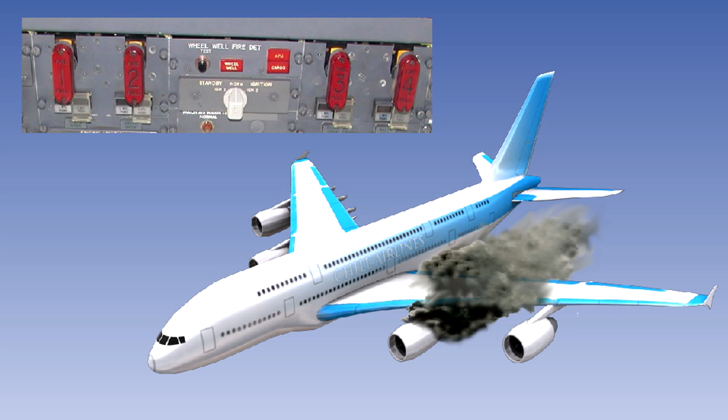In this lesson, we will discuss the fire detection systems fitted to all aircraft.

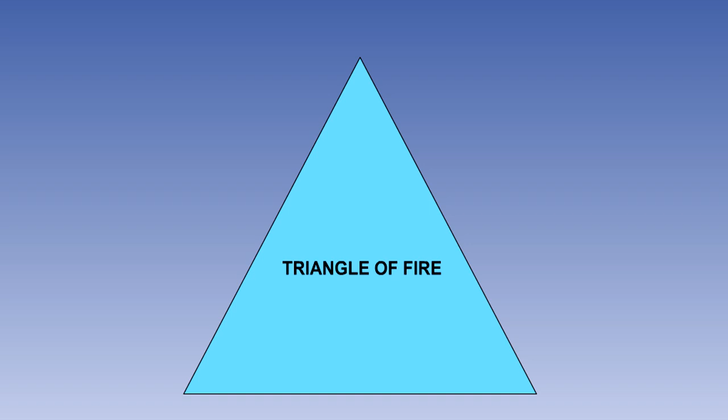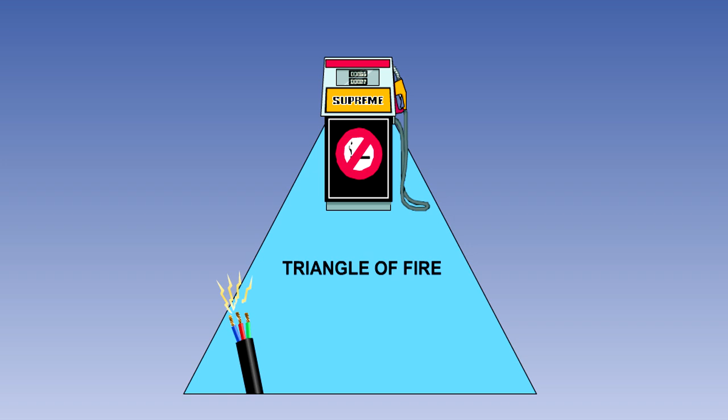A fire cannot exist without three things being present: heat or a source of ignition, fuel, material that will burn, and oxygen. This is known as the triangle of fire. Take any one of the three away and the fire will go out.

A fire in an aircraft is extremely dangerous. So to protect the aircraft, the crew and the passengers, aircraft must have fire detection and extinguishing systems fitted in all areas where a potential fire risk may exist, following failure of or leakage from any component or associated equipment.

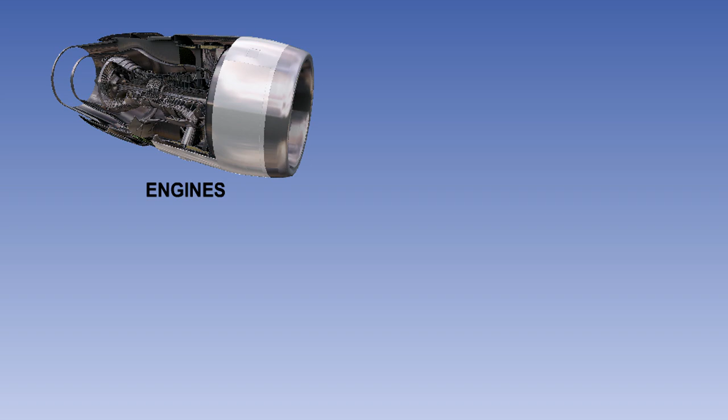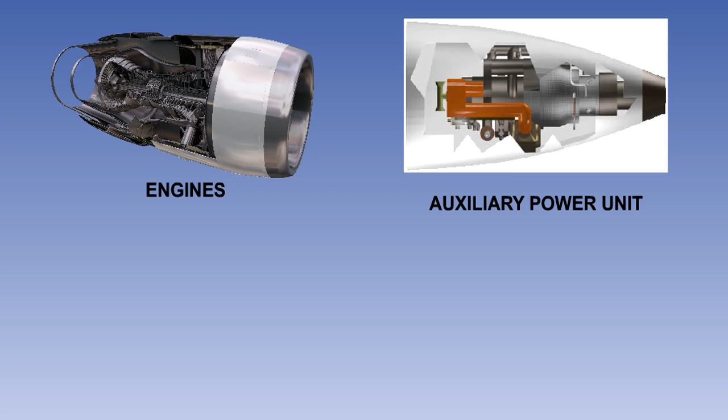The specific areas that require protection are the engines, the auxiliary power unit or APU, the main wheel wells, and the cargo compartments.

These areas are known as designated fire zones, and they must have detection systems fitted to warn the crew of a fire.

In the case of the engines and the auxiliary power unit, they are isolated by fireproof bulkheads, known as firewalls, normally manufactured from titanium or stainless steel, which will contain any fire to the immediate area and prevent it from spreading to the rest of the aircraft.

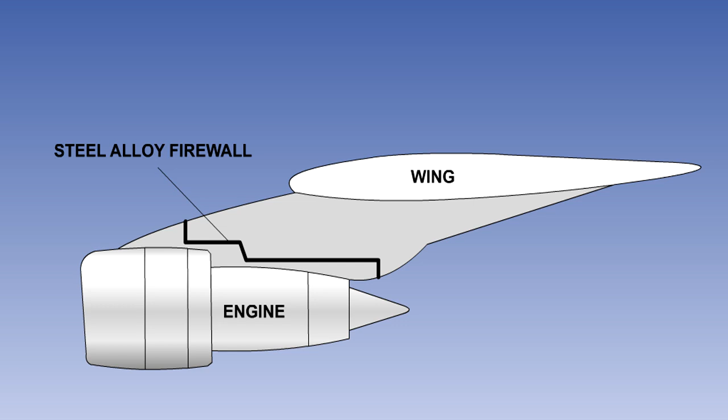Each designated fire zone must have a fire detection system which is capable of providing rapid detection and warning of a localized fire or overheat condition. There are a number of detection systems in use, and we will now take a look at them.

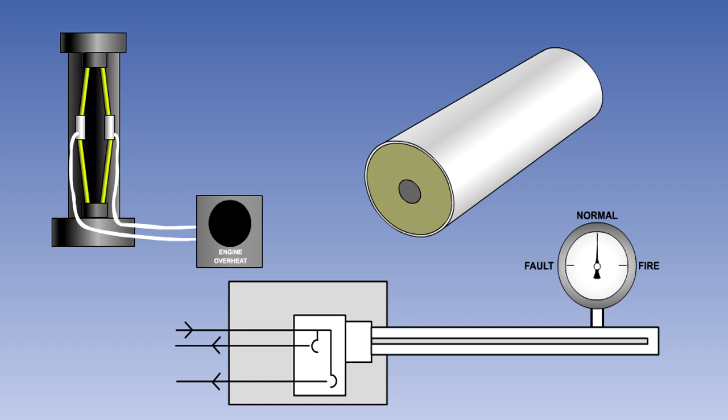Differential expansion detectors use the fact that when heat is applied to different materials, they will expand at different rates.

A detector consists of a pair of contacts mounted on a spring bow assembly, fitted within an expansion tube, which is mounted on a base. The spring bow is fixed to the tube at the top and the bottom. When heat is applied, the tube expands at a greater rate than the bow, drawing the contacts together.

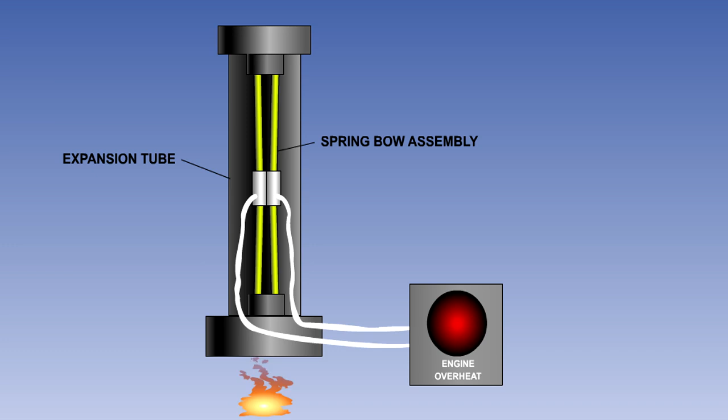When the contacts come together, they provide power to the warning circuit. A subsequent drop in temperature will cause the tube to shorten, the contact to open, and the warning to stop. This type of detector usually incorporates a short time delay before the warning is activated, to prevent false warnings due to vibration.

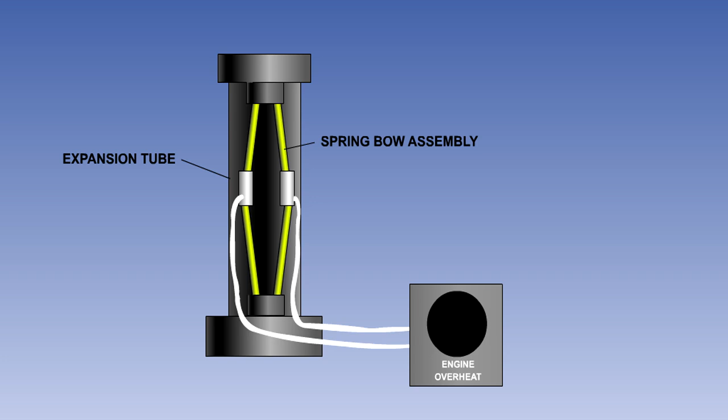Differential expansion detectors are often used to monitor engine cooling air outlets in order to provide internal engine overheat warning. In the event of this warning being given, the pilots will normally be required to shut down the engine.

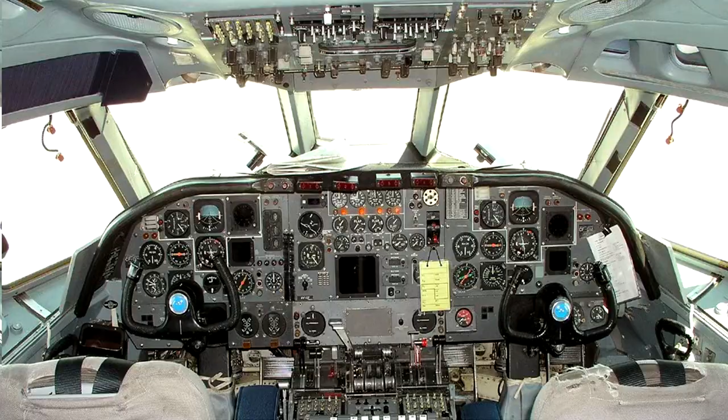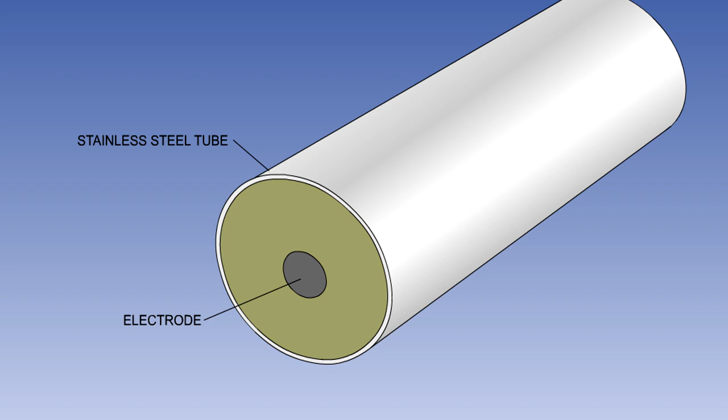Engine and auxiliary power unit fire zones are often fitted with continuous loop fire detectors, commonly known as firewire systems. A detector unit consists of a stainless steel tube with a central electrode insulated from the tube by a core of temperature-sensitive material.

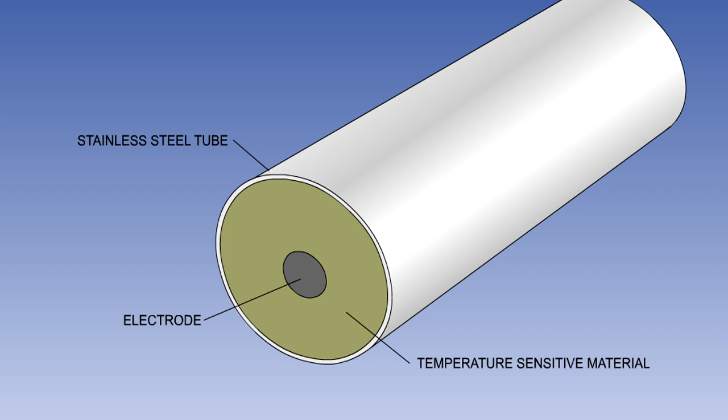Firewire detectors operate on the principle of their core material having either a negative coefficient of resistance with temperature or a positive coefficient of capacitance with temperature. In one system, both methods are used together.

In the resistive type of firewire, as the temperature increases, the resistance of the insulating material decreases. This causes the current flow between the central electrode and the outer tube to increase, until, at a predetermined temperature, sufficient current will flow and the warning system will operate. If the temperature drops back below a preset value, the system will automatically reset, and the warning will stop.

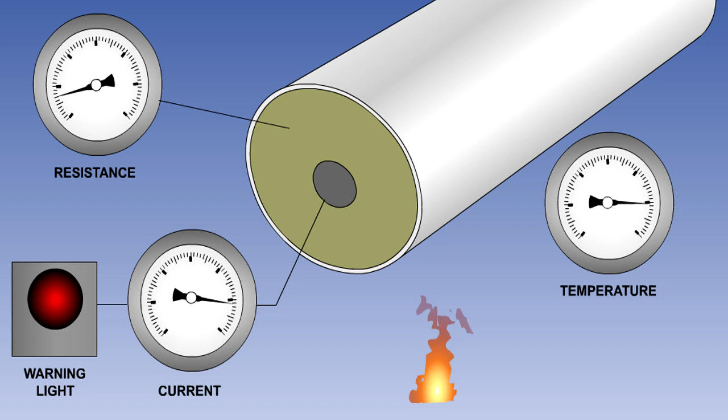This type of detector will react and give a fire warning if there is an isolated temperature increase, for instance from a direct flame, or if the temperature of the entire detector increases, possibly because of a hot gas leak.

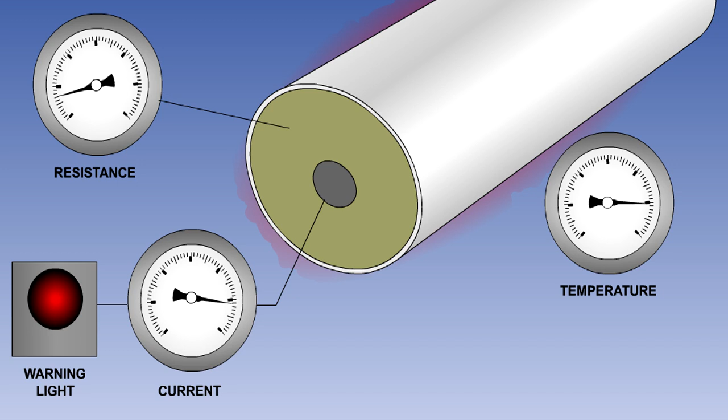Because the loop is connected to the control unit at both ends, the system will continue functioning with a single break in the firewire. One particular problem with this type of system is that a short circuit between the case and the inner electrode will give a false fire warning.

In the capacitive type of system, the detector acts as a long capacitor, with the core material acting as the dielectric, and the case and the inner electrode as the poles. The case and the inner electrode are connected across an AC supply.

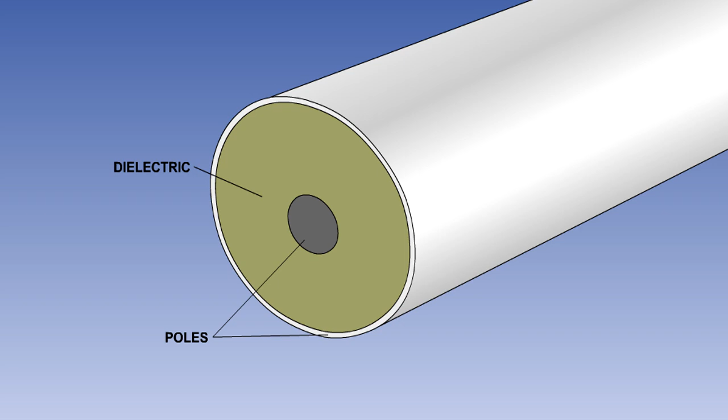An increase in temperature causes a change in the properties of the inner core material. This change increases the capacitance of the detector. The firewire is polarized by the application of half-wave rectified alternating current from a control unit, which it stores and then discharges as a feedback current.

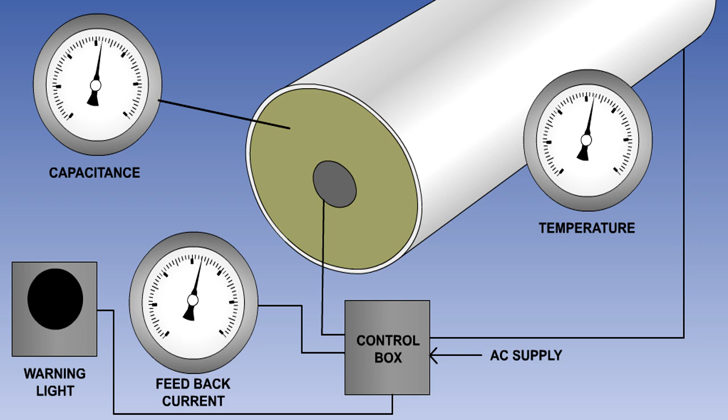As the capacitance increases with temperature increase, so will the feedback current. Once the feedback current reaches a predetermined level, it activates the fire warning. As with the resistive type, this system will reset itself once the temperature drops below a preset level.

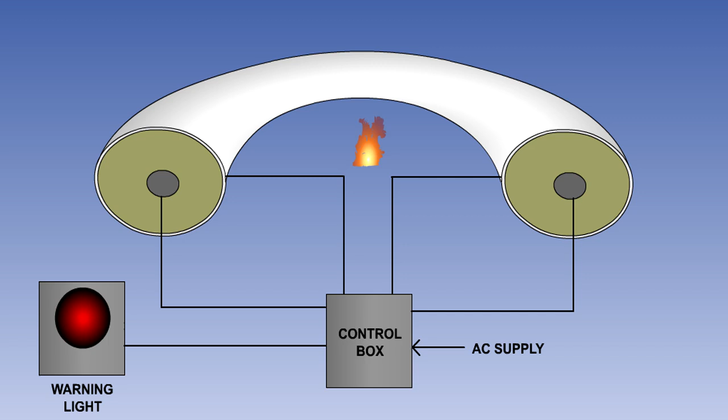This type of detector will also react and give a fire warning if there is an isolated temperature increase, for instance from a direct flame, or if the temperature of the entire detector increases.

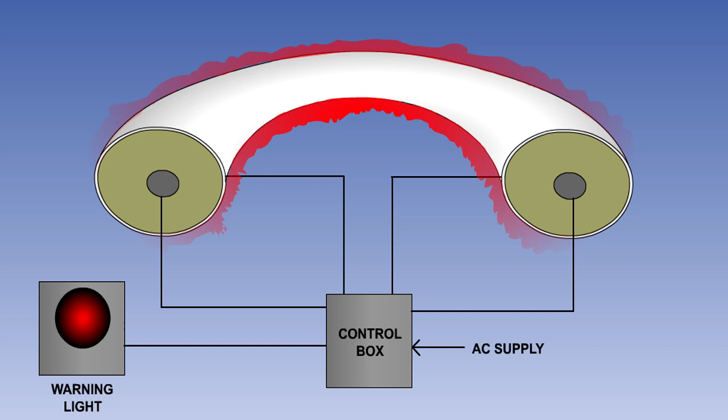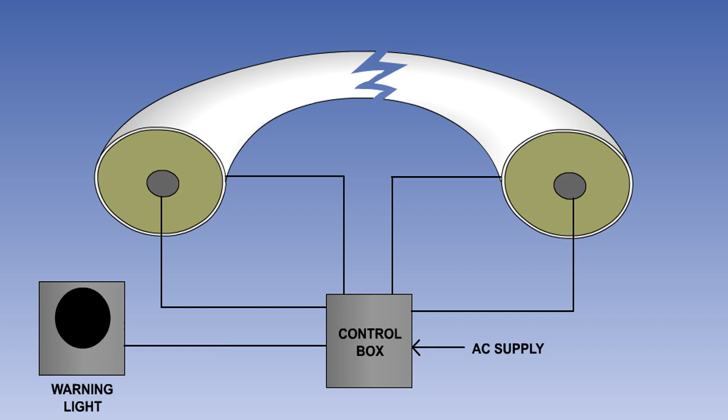Again, as with the resistive system, the loop is connected to the control unit at both ends, so the system will continue to operate normally in the event of a single break in the firewire. This system has the advantage over the resistive type in that a short-circuit grounding of the element or system will cause the capacitance to fall to zero, so will not result in a false warning.

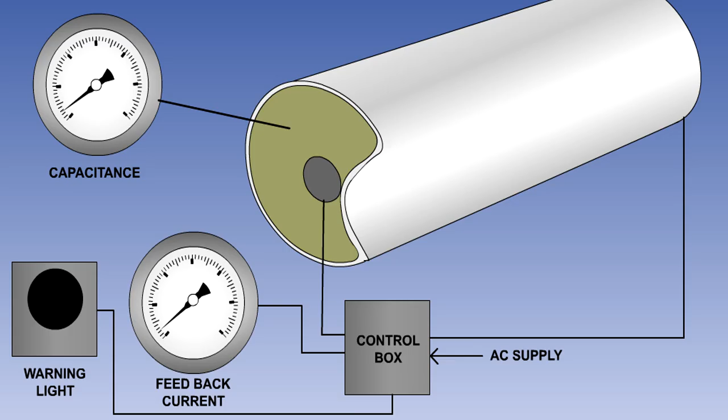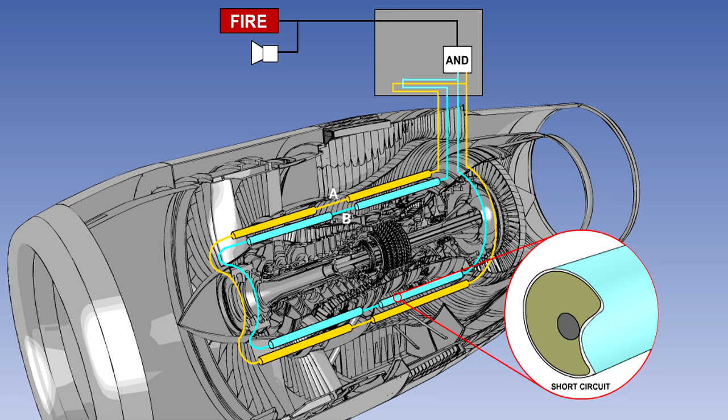Firewires are positioned around engine fire zones in a continuous double loop. The two loops are normally known as Loop A and Loop B, and they operate independently. Both loops need to detect a fire to initiate the warning. In this way, spurious warnings caused by one loop giving a false fire indication, possibly due to a short circuit, are prevented. Warning of any loop failure may be displayed on the fire detection panel or electronic system display unit.

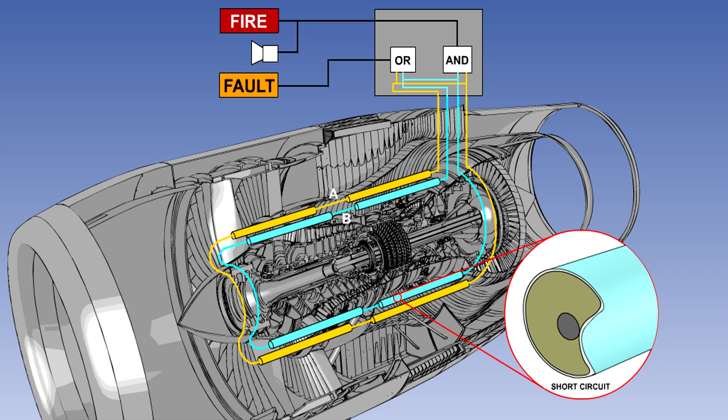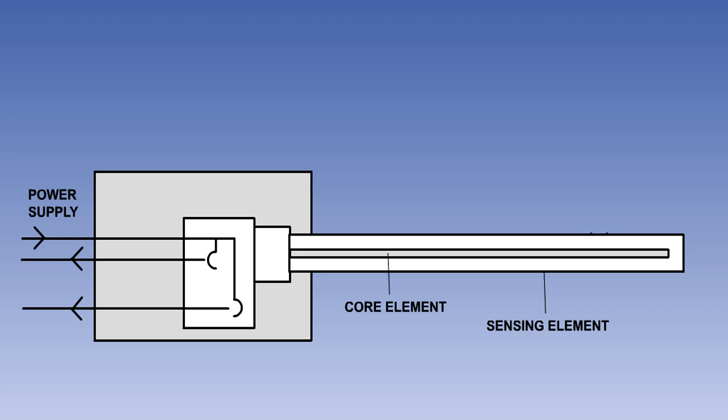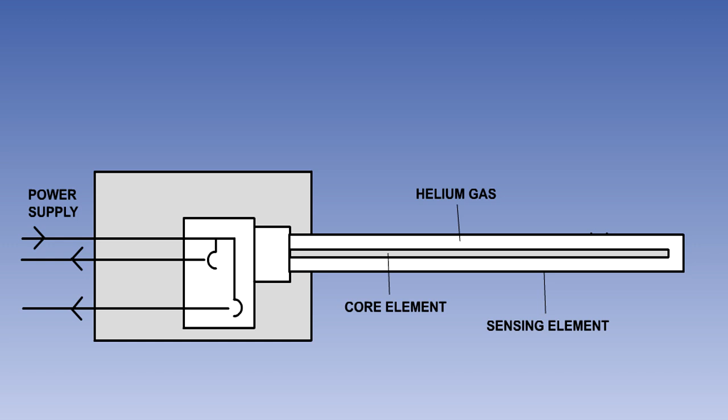The last system we are going to look at is the gas-filled detector system. This system consists of a number of sensing elements which look very similar to firewire, and they are used in a very similar way. The tube has a central core, made up of a material which will give off hydrogen gas when heated to a high temperature. During the manufacturing process, helium gas is forced into the tube under pressure. The tube is then sealed.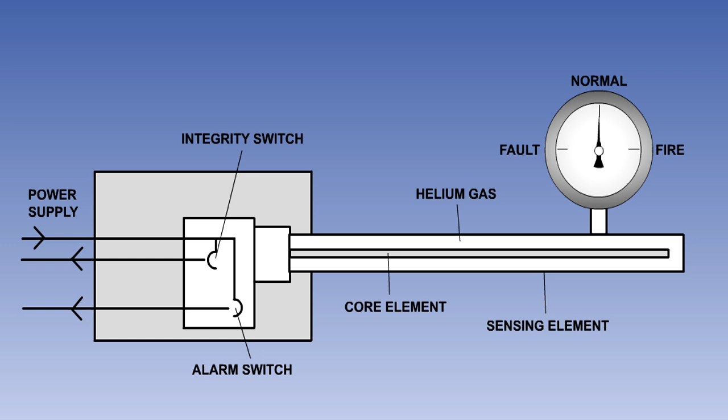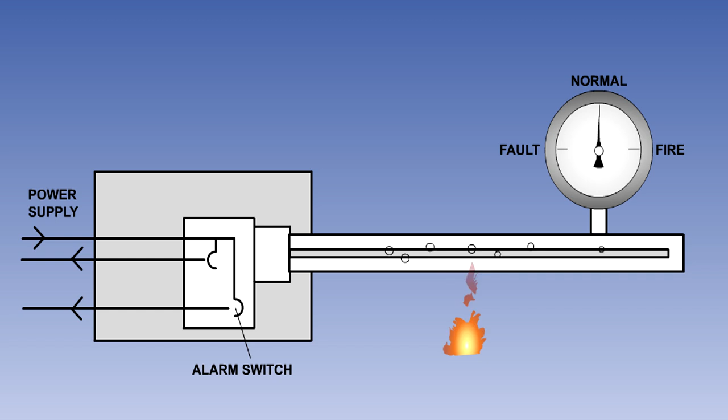As with firewire, the detectors are positioned around the fire zones in a double loop, with both loops again being required to detect a fire before a fire warning is given. When the gas-filled detector tube is heated locally by a flame, the helium pressure may not increase sufficiently to trigger the warning. However, hydrogen gas is released from the core material, and the pressure in the tube will build up. This increase of pressure is sensed by the alarm pressure switch, which will close. This will send a signal to a control box, which will initiate a fire warning.

In the event of a hot gas leak, the temperature increase will be less than that caused by a flame, but it will be felt over a larger area of the detector. This increase in temperature may be insufficient to cause the release of hydrogen gas, but it will cause sufficient increase in the pressure of the helium gas to close the alarm pressure switch and initiate a fire warning.

Should the tube be damaged and the helium gas be released from the core, the pressure will fall and the normally closed integrity pressure switch will open. This will cause a fault indication on the control panel or electronic systems display.

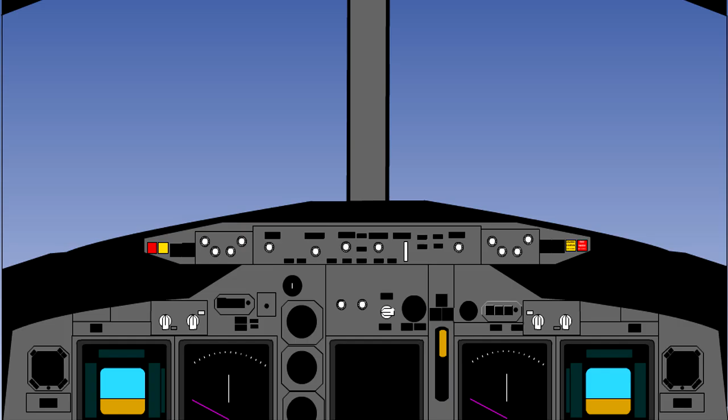Whichever detection system is used, flight deck indications of an engine fire will normally be both aural and visual. The aural warning will normally be a bell or a klaxon, or possibly a continuous repetitive chime. Visually, there may be a master fire warning caption and a steady red fire warning light for each engine.

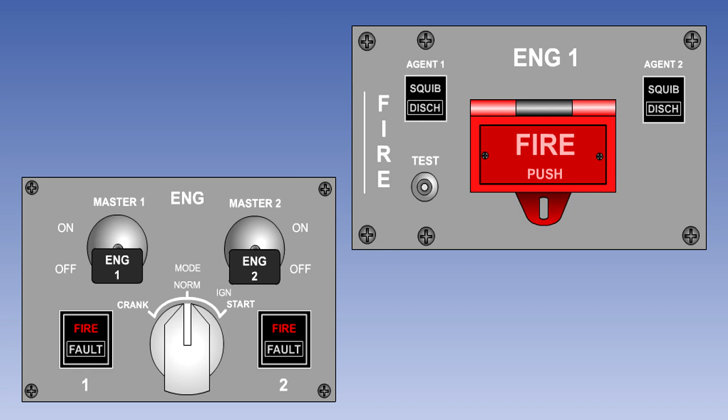Before flight, a means must be available to test the fire warning circuit. A fire test selector is therefore provided for the flight crew. With differential expansion detectors, a simple continuity test is carried out on the wiring between the detector or detectors and the warning light. A satisfactory test is indicated by illumination of the warning light.

When a fire test is initiated on a firewire system, a continuity test is carried out on both the outer tube and the inner electrode. A satisfactory test is indicated by a full fire warning being displayed for all engines being tested. Should there be a break in either the tube or the electrode of the firewire for a particular engine, then the test will fail, and a fire warning will not be given for that engine.

When a fire test is carried out on the gas-filled system, again the integrity of the loops is tested. But also, if the gas has leaked out and the integrity switch is open, then the test will fail.

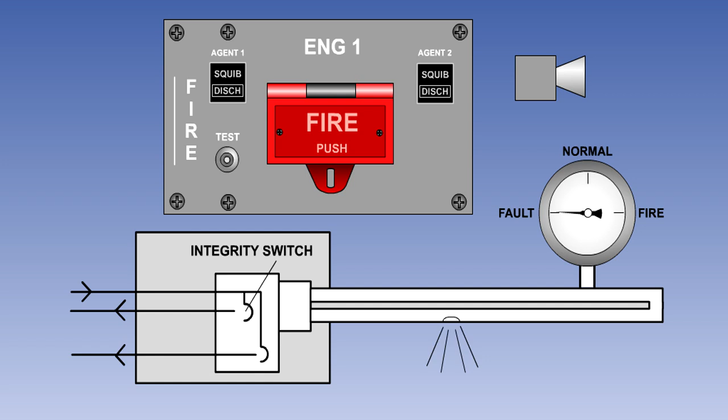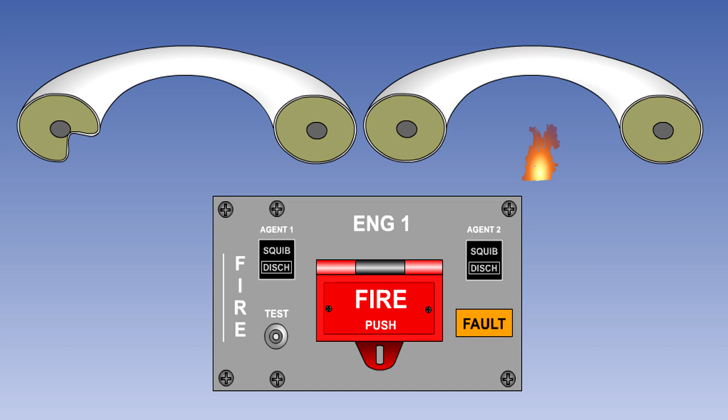In some firewire and gas-filled detector systems, a warning is given to notify crews if a single fire loop should fail in flight. The system may now automatically switch to single loop operation, with a fire warning being given if the serviceable loop alone senses a fire. Depending on aircraft type, a limited number of sectors may be permitted to be flown in the single loop mode.

That is the end of the lesson. Here is a summary of the main points. Click to go on to the next one once you are sure you understand the point being displayed.

The areas of an aircraft fitted with fire protection systems are the engines, the auxiliary power unit, the main wheel bays, and the cargo compartments.

Differential expansion fire detectors use the fact that when heat is applied to different materials, they will expand at different rates. Remember that these detectors usually have a time delay built into their warning circuits to prevent false alarms caused by vibration.

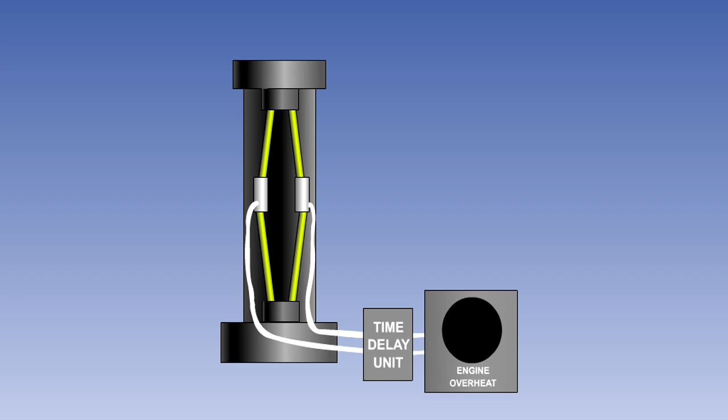Resistive and capacitive firewire systems have the detector connected at both ends, so with a single break, the detector will continue to function. The system test checks the continuity of the loop as well as the warning system, so if there is a break, the test will fail. If a resistive firewire is short-circuited, it will give a fire warning.

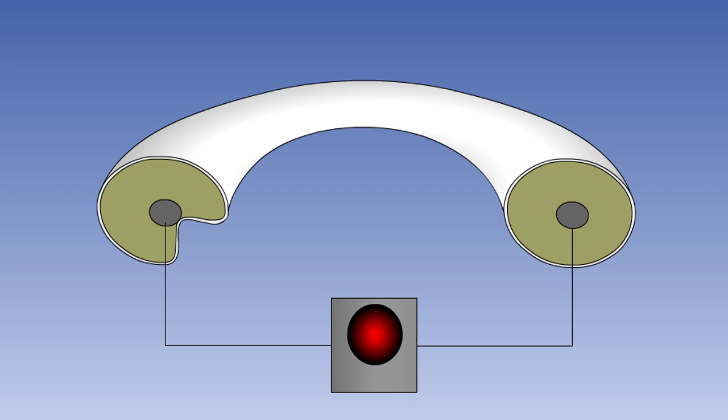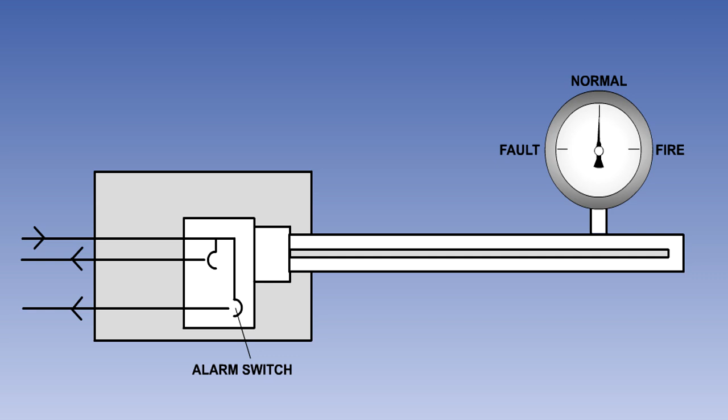The gas-filled system uses the fact that the pressure of the gas in the detector increases with increasing temperature to trigger a fire warning. When a test is carried out on the gas-filled system, the integrity of the loops is tested. If the gas has leaked out, the integrity switch will open and the test will fail.

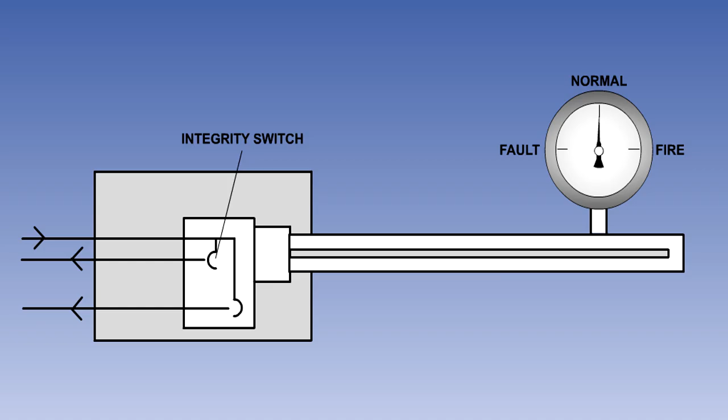Finally, flight deck indications of an engine fire will normally be both aural and visual.